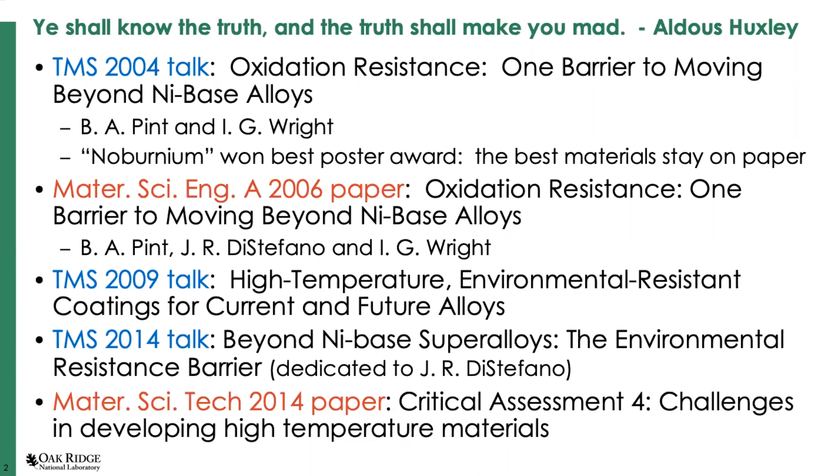If I go back to the summary in 2004, I have to say that not much has changed. As we go to higher temperatures, oxidation issues become more important and harder to ignore. I think it's a foolish strategy to think that practical high temperature materials for normal applications are going to be developed and adopted without inherent oxidation resistance.

And then, again, 2004, quite a while ago, talking about combustion environments and alumina-forming substrates, that alumina-forming alloys are going to have a strong advantage because alumina is more stable than some of the other thermally grown oxides. And I talked a fair amount about state-of-the-art nickel-based superalloys. And I realize that might sound dated, and the kids today might call me an old man. I'm actually not a baby boomer, but I have been doing this for a long time. And the last point, coatings should not be considered prime reliant.

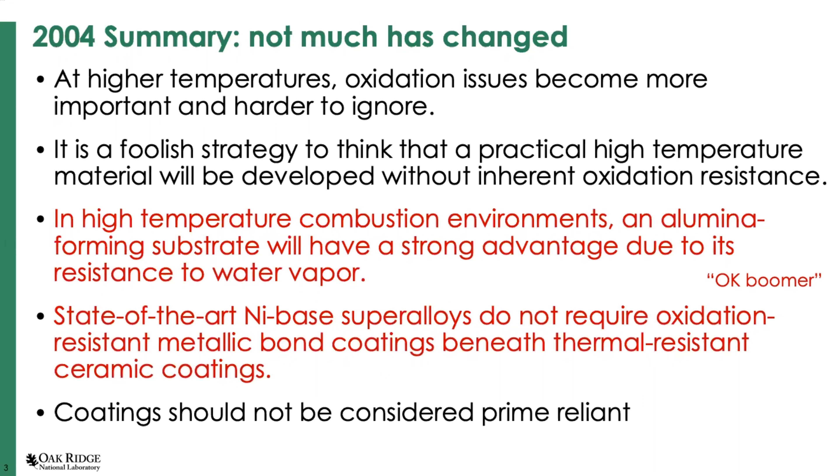So 2014 comes around, and I made some comments then. When I was in graduate school, everybody who was at this PhD defense remembers John Elliott said to the candidate afterwards that what he had presented would only impress the uninformed. Not many people make that kind of harsh comment today, but I do believe that life's short, research dollars are scarce, and we should all be pushing to get to the bottom of things.

If you're worried about ductility, then measure it. If you're worried about embrittlement, or you have a coating that's going to prevent embrittlement, then prove it. Don't just talk about it or show nanoindentation. Show some properties. And I do believe there's a gap between research and application. And that goes back to this issue of who are you trying to impress? Are you trying to get a paper written, or are you trying to impact the technology that you're working on?

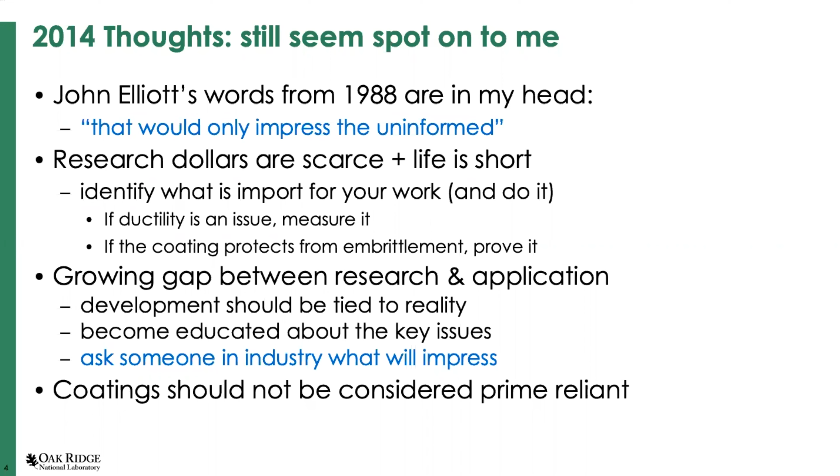You need to tie that development to reality, become educated in the key issues, and talk to people in industry. And if you can impress them, you probably got something. And just repeating from 10 years earlier, we shouldn't think of coatings as being prime reliant. Certainly not for power generation applications that are of interest to the Department of Energy.

So let's talk about environmental resistance. Let's start by posing a few questions. What applications require high temperature materials? Things like aero engines, power generation, chemical processing, furnaces, and what kind of service times do these applications require? And of course, longer is always better. But if you're talking about an aero engine, you better be on the wing for at least 5,000, if not 15,000 hours. You might get away with shorter times for military engines. They're willing to pay more for performance, but that's a pretty narrow scope. Maybe even shorter times if we're talking about things like missiles.

And when we start talking about power generation, though, reliability is really the key. So you better be talking about 40,000 hour lifetimes. If you're talking about a 30-year plant life, it's 250,000 hours. Nuclear folks talk about 60-year plant lives. The fusion people, they'll settle for a fraction of that. But it's something to remember when you're designing your experiments.

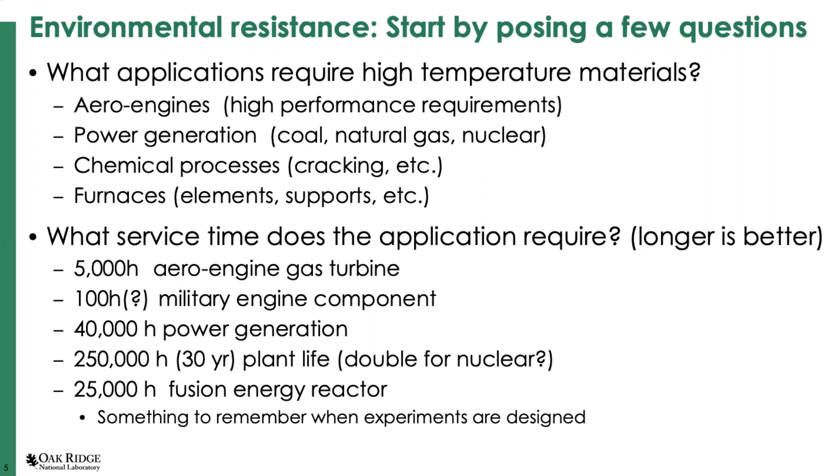A comment I've gotten in the past when I've made presentations like this: oh, we couldn't do that during a PhD thesis. Well, you know what? 1,000 hours is still only 6 weeks. And if you devote only a fraction of your experimental work to oxidation testing, you can do a fair amount if you want to. And again, who are you trying to impress with your 10-hour test? Is it relevant?

So maybe another question I'll just throw out there. Do you know where your electricity comes from? Do you know what's happening on the grid and where things are going? And maybe another thing is, even if you do know where things are, did you know that we've had a flat demand for the last 10 years? Remarkable, after a sort of 100-year period where we're just increasing all the time, constantly building new generation.

We've had more than 10 years now since the 2007 peak, I guess 14 years, that there really hasn't been any increase in demand. And so something has to come off the grid for new generation to go onto the grid. And so as renewables have jumped up, coal has really taken a beating, but natural gas has come in to replace it. So we're still using a lot of fossil fuels.

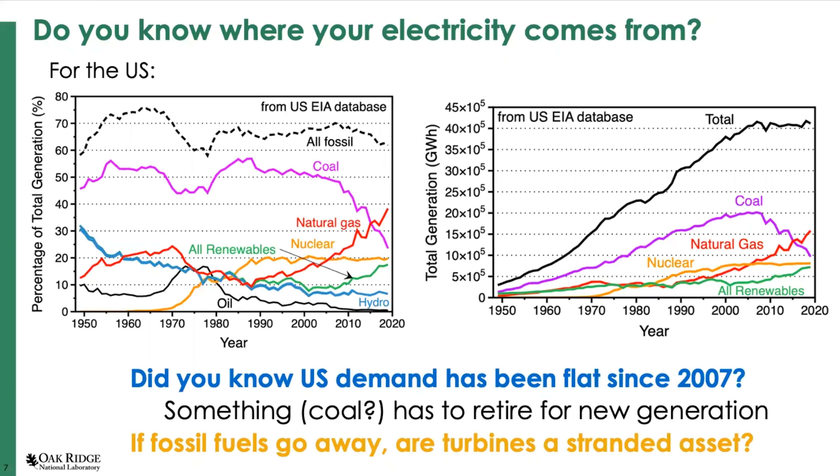But if you think about it, we're on this trajectory of using more natural gas. But if we want fossil fuels to go away, utilities are reluctant to purchase turbines because that could be a stranded asset in the future. And then think about what service temperatures are required. And I know people like to talk about really high temperatures for things like turbines, but again, maybe that's not really the future anymore. And certainly higher temperature is going to give you higher efficiency.

I have a plot here from Brij Seth at Westinghouse showing the turbine inlet temperature and how turbine efficiency is going up. But if you look at the ASME allowable stresses for a number of structural materials, their properties are declining rapidly in this sort of 600 to 800 degrees C range. And this is why when you look at a coal plant, they're only at 607 degrees C, and they call that ultra supercritical, USC.

Nuclear plants, man, they think 330 degrees C is hot. But, I know coal plants, I'm an old guy. Maybe most of those will be shut down by the end of the decade.

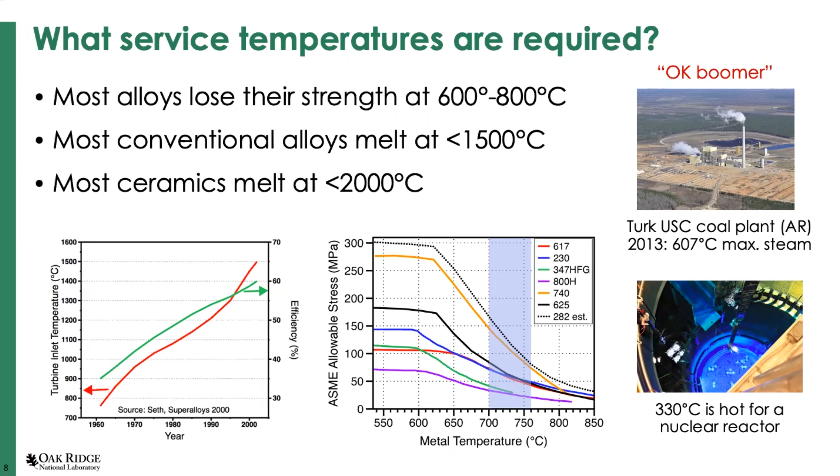So what has interest right now is that ARPA-E is about to kick off their ULTIMATE program, and they want to look at materials for 1300 degrees C. They have metrics to achieve for creep and fatigue at 1300 degrees C, but the metrics don't specify the environment. So I am part of this program, but just for the mechanical properties testing and not so much for environmental effects. And they are going to focus on refractory metals, as you can glean from their logo.

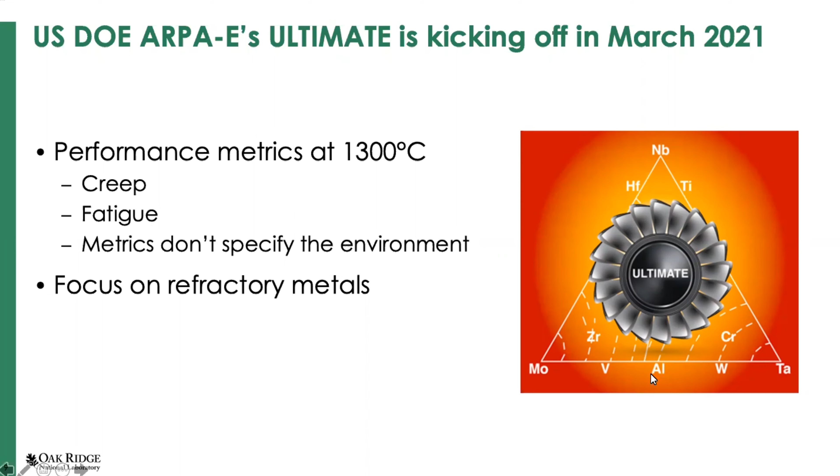And so the point I want to make about how we assess things is that we can very easily replace our coupons with tensile specimens if we want to. I recently got a quote, and I was paying a little over $20 each to have coupons machined from some cast materials that I needed to evaluate. And typically these tensile specimens, depending on the machine shop and how busy they are, we're paying $50 to $75 a piece. So relatively modest increase in the cost of the specimen.

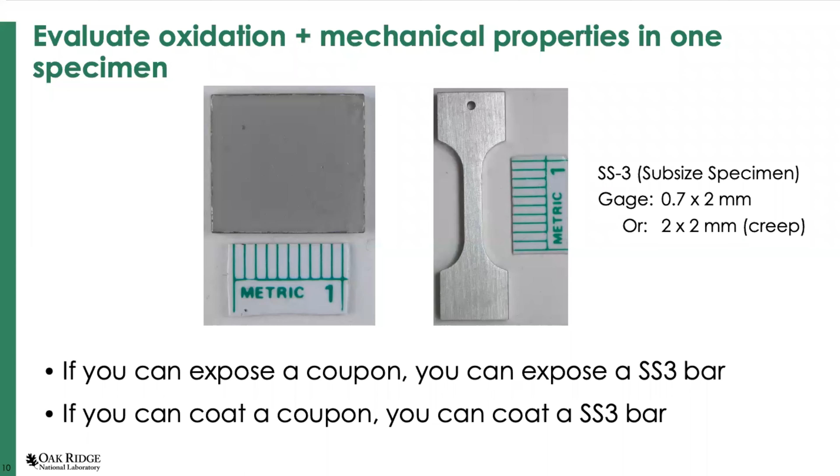And honestly, if you can test a coupon, you can test a tensile specimen. And if you can coat a coupon, you can probably coat a tensile specimen, if you really want to know what those properties are. And we've made different versions of this, increasing the gauge depth and thickness. So we get a 2x2 gauge for doing creep testing on some of these. And you can look through the literature and find examples where we've reported things like that in the past.

I'll just give you a couple examples real quick. Again, this notion that you can do everything you want with a tensile specimen that you can do with a coupon. So here's a study where we're looking at turbochargers. You might think this is a little bit outdated, but there is interest in high efficiency combustion engines while we wait for electric vehicles to take over.

And again, with these tensile specimens, we can measure mass change. We can report kinetics. We can section them, look at the reaction products. Again, these are all from SS3, sort of 25 millimeter long specimens, and then we can break them.

And the interesting thing about this study was that we were expecting to see that the titanium aluminides were going to embrittle during these exposures at 850 and 950 degrees C, for 1,000 hours at 850 and 500 hours at 950. And in fact, they didn't lose any ductility. So surprised, and apparently those materials have come a long way. Certainly, they had thicker reaction products, but we didn't see the embrittlement that others had reported.

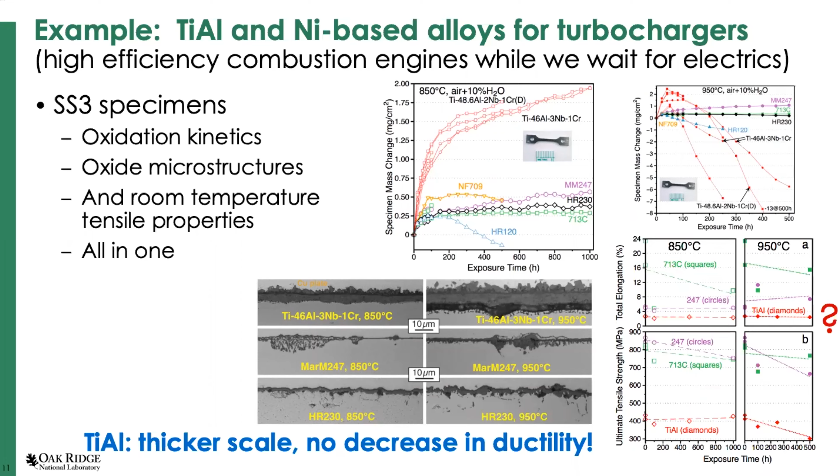But the one thing we were able to prove in this study was that if we annealed the specimens at the same temperature, we get the same effect, in the same temperature range, I should say. We only selected 3 temperatures to evaluate and got the same type of embrittlement going on. So again, it wasn't the lead lithium environment per se that we were doing the environmental test. The alloys performed very well at that temperature.

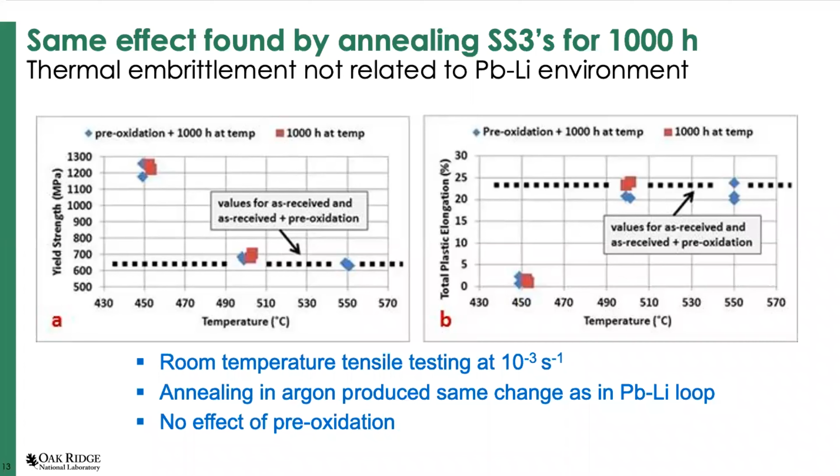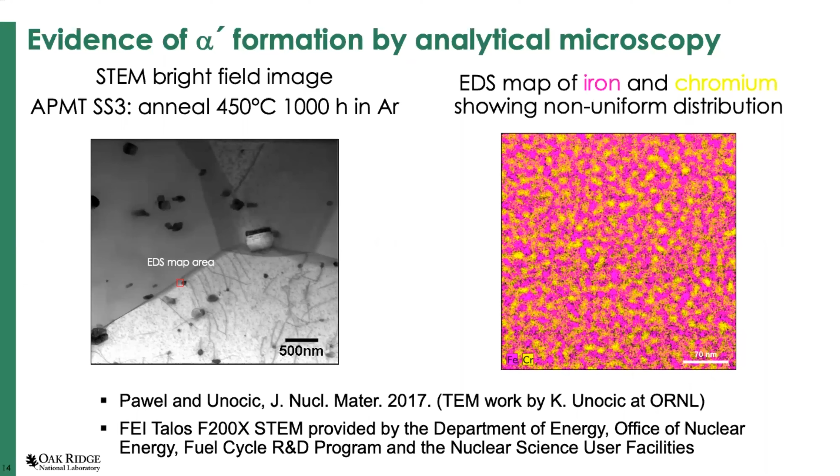But again, we can use our SS3 specimen and do some nice TEM work. There's some results from Kinga Unocic, and Steve Pawel were the primary authors on this publication. And you can see that we did form the alpha prime, very fine scale. You can look at this 70 nanometer micron marker, and you can see that alpha prime formation for the chromium enrichment, and that's why you get the embrittlement. Really nice microscopes nowadays can see things like that.

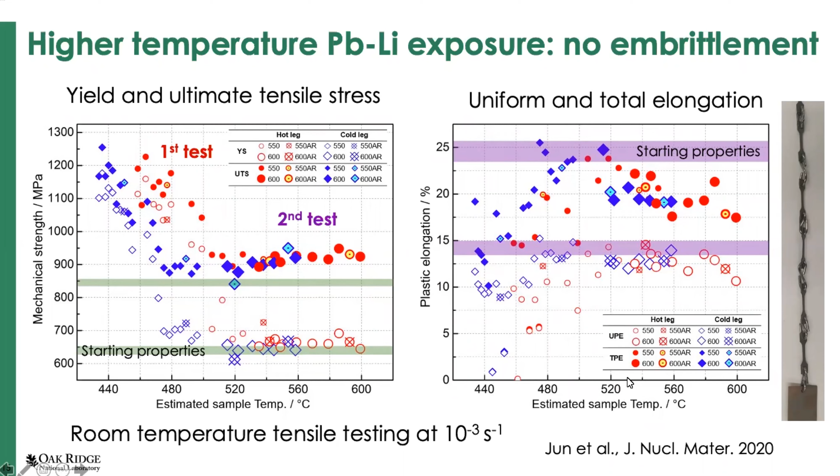And finally, when we did our next experiment at a higher temperature, we didn't see any of this effect. As we went to higher temperature, we got away from that embrittlement range, and now we didn't see any instance of really strong loss in ductility or change in the yield or ultimate tensile strength. The shaded areas in each of these plots is the starting properties of the APMT material. And this was reported a little more recently, again, in the Journal of Nuclear Materials. And again, chain of specimens so that we have different temperature exposures for each of the specimens in these 2 experiments.

Now, let's get back to refractory metals. I don't have as many results, frankly, with refractory metals. Haven't worked in that space in a long time, but there are some unusual things, and perhaps you know this, that the majority of refractory metals have a high solubility for oxygen, and they do form stable oxides, but they tend to grow really fast. Here's an example, the specimen mass gain at different temperatures. NB1ZR compared to moly, we get very thick oxides forming on the NB1ZR. This is actually an experiment to simulate the Mars environment.

The opposite is moly and tungsten, where you have low solubility for oxygen, but relatively unstable oxide. So you have a tendency at high temperature for the oxide to evaporate. And so the question becomes, which problem do you want to address? And so, again, my mentor, Jim DiStefano, got a good laugh out of the fact that when he started in the 1950s, GE was working on moly-based alloys and Pratt & Whitney was working on niobium alloys. And when things reshuffled in the 1990s, they had reversed. And he felt that Pratt & Whitney had learned a few things and chose a different pathway when they had an opportunity.

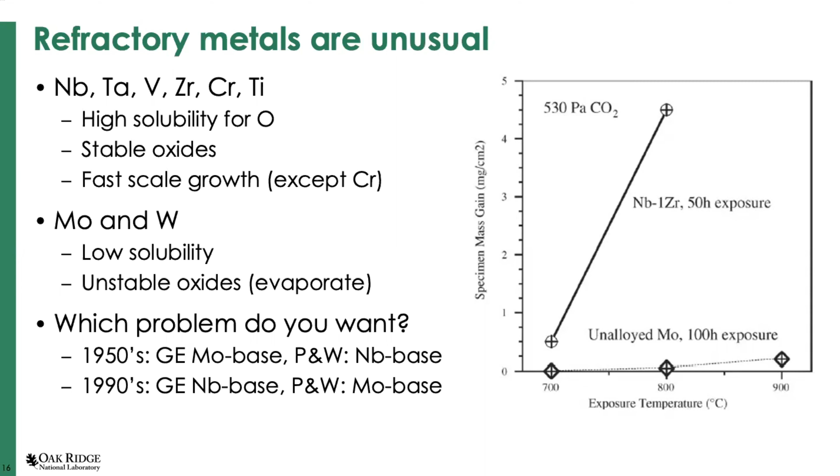So one more experiment that Jim and I did. I listened to him for many years talk about what he did on his PhD thesis on NB1ZR. And so I decided to repeat that experiment for some vanadium alloys that we were studying for the fusion program. And we're looking at how vanadium alloys would react in a helium environment, perhaps with some oxygen impurities. And so the interesting thing is, if you expose a vanadium alloy at say 600 degrees C into a low partial pressure of oxygen, you have oxygen uptake. The specimen comes out shiny. Here's an example down here.

But if you pick up enough oxygen, you'll eventually embrittle the alloy. So here's the elongation. You start off at about total elongation over 30%, and pretty soon you're down to less than 5%. And then at the same time, as you're picking up oxygen in the alloy, the yield and ultimate strength are increasing. And so it's not particularly surprising.

When you do the same experiment in a high partial pressure of oxygen, or in this case, we did it just in 1 atmosphere of helium, you can grow an oxide on the surface. And so picture of it right here, there's an oxide on the surface, and you can calculate that that's the equivalent of picking up about 5,800 parts per million of oxygen. And that's way off the scale of this plot here, but we still had 10% total elongation, because most of the oxygen was actually on the surface.

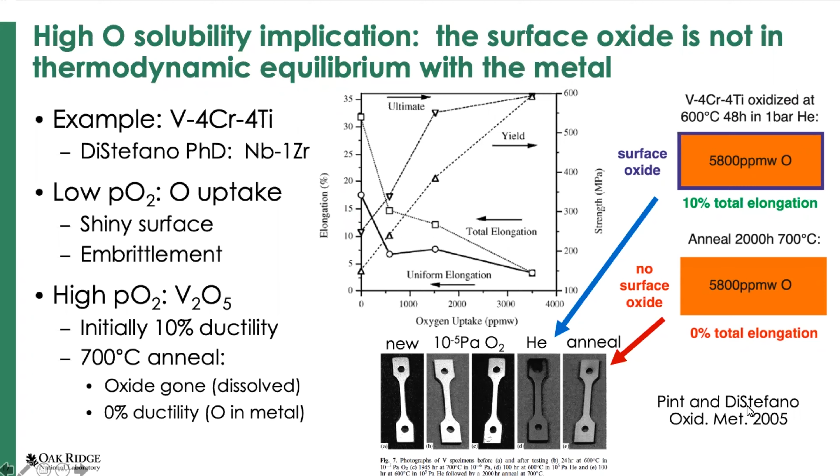And so the oxygen went into the alloy, and now we can test that, because again, we're doing it all on tensile specimens. And now we have no ductility anymore, because now we get 5,800 parts per million oxygen in the alloy. And a relatively shiny specimen, once again. Not quite as shiny as it started, but we don't have the clear oxide formation on the surface. And you can see that publication that we had back in 2005.

Now, last part about coatings. A lot of times you hear that coatings are going to solve all the problems. I'm going to go ahead and develop my alloy that has no oxidation resistance, and I'm going to coat it. And so two folks that I listened to for a long time, Ram Darolia and John Smialek, both had kind of negative feelings about coatings, but we do use them anyway. But they shouldn't be considered prime reliant.

And so just a couple of quick comments that if you think about coatings for superalloys, interdiffusion is the biggest issue for coating lifetime. And again, we're the Department of Energy. We're looking at land-based gas turbines. We want long lifetimes. It used to be the bar was 25,000 hours. Now a lot of times they're talking about 40,000, even 50,000 hour lifetimes. The only way you're going to get that is to keep the coating temperature down relatively low. You see a lot of testing in the literature at 1,000, 1,100, 1,150, 1,200 degrees C.

But in fact, you can look at this specimen that's been exposed for 20,000 hours at 900 degrees C and see that we've already degraded sort of half the coating. The darker region is the beta, aluminum-rich beta phase. And because of interdiffusion, we've got depletion here and here. The alumina grit is marking that original interface between the coating and the superalloy substrate.

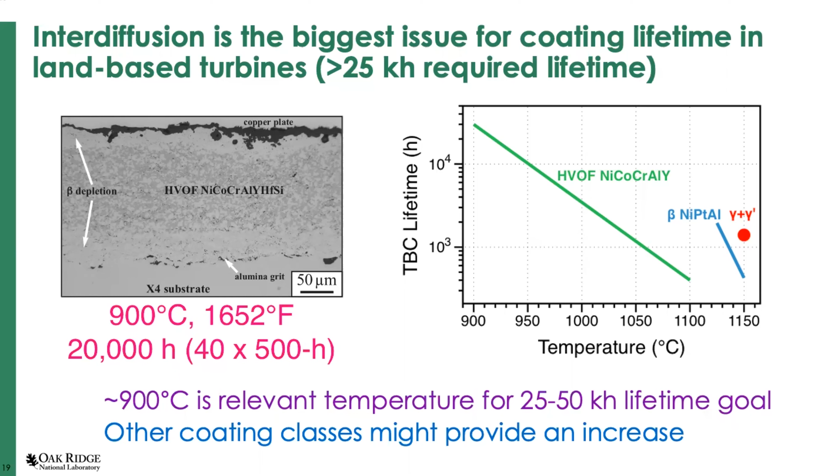So again, 900 degrees C doesn't sound very high, but that's about where a lot of land-based gas turbines are operating. Now that's the metal temperature. So you've got a higher temperature because you've got a thermal barrier coating on top of that. And you might be able to improve it a little bit by other coating classes, but these days the industry is mainly using these MCrAlY type coatings. And again, I'll make the same point again. Interdiffusion is the biggest issue for coating lifetime.

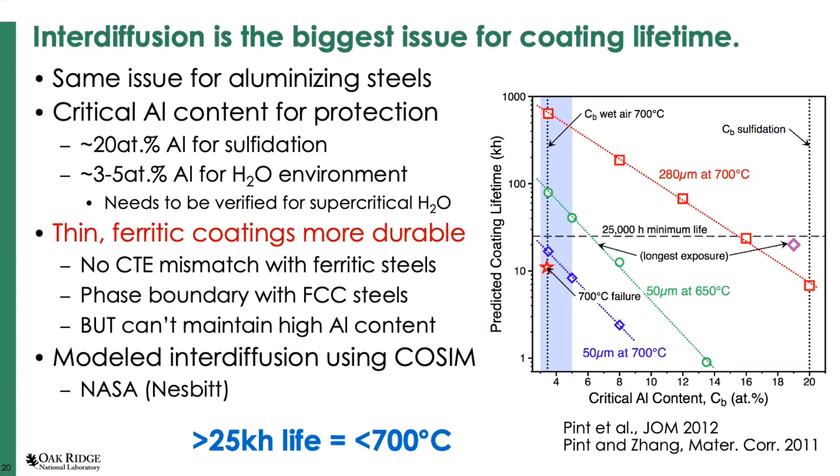So finally, I'd have to say my summary here is not going to change much from previous talks. I think that defining the application will assist in defining relevant experiments: temperature, environment, stress, time. And for things like assessing ductility, subsize tensile specimens have been very useful. And I think, again, if you want to talk about embrittlement, then measure it. There are some challenging strategies out there. Developing materials without oxidation resistance and thinking that coatings are going to solve the problems is a challenge. And then finally, among thermally grown oxides, alumina is always going to have an advantage.

I didn't get into this too much, but if you think about it, you still have to have a reservoir of aluminum in your coating or in your alloy in order to form that. And really, if you look at the numbers, some of the studies that NASA's done, when you start talking about 10,000 hour lifetimes, you're not going to go far beyond 1200 degrees C with any kind of coating. So you should just understand, none of the oxides are slow enough growing to really sustain long-term behavior at very high temperatures.